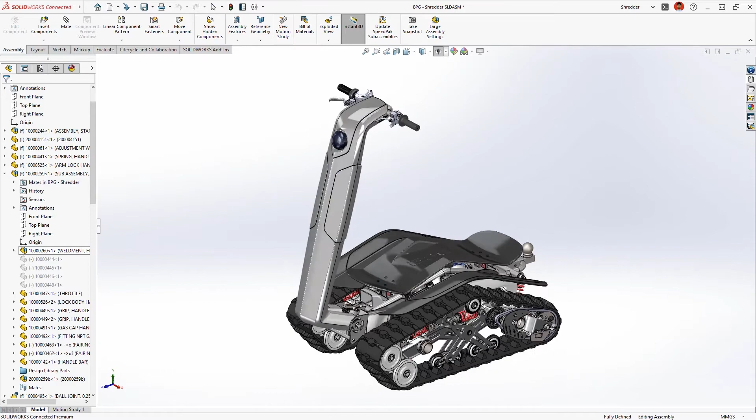SolidWorks is the most feature-rich CAD solution available, but that doesn't mean significant improvements can't be made. In SolidWorks 2023, we focused on expanding the capabilities of existing features to make you more productive.

Inscribing information such as serial number or model names into cylindrical surfaces is best done with single-line fonts. SolidWorks 2023 allows you to scribe these fonts using the wrap feature.

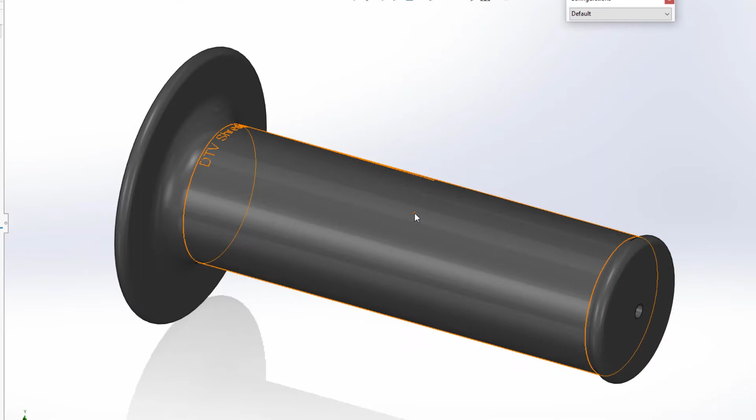Adding the DTV logo to the end of this handle is easy with library features, just drag and drop. However, in some situations, a reference may not be valid or otherwise broken. In 2023, you now have the option to keep the feature and solve the issue manually, rather than having to cancel the action, edit the library feature, and reapply.

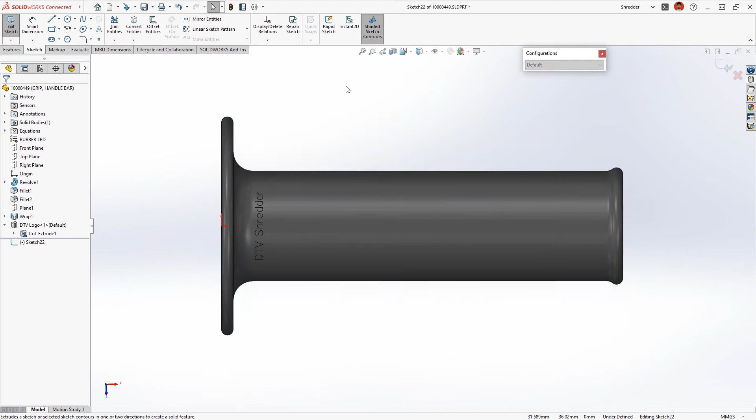This design is a good start, but the smooth surface may not provide enough grip for the rider. Let's create a pattern of ellipse-shaped bosses to give the rider confidence when traveling over even the most extreme terrain.

In SolidWorks 2023, you can now create ellipses with construction geometry, making orientation effortless by selecting a construction line, then choosing the appropriate relation. Fully defining the ellipse is now easier too, since you don't have to select multiple points to define the major and minor axes.

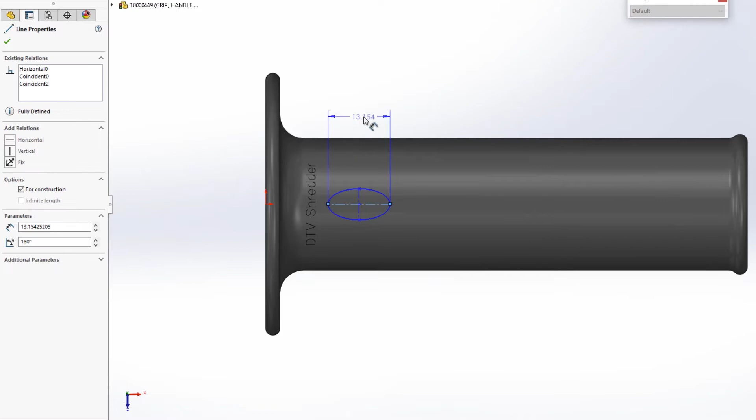Creating an offset body is easy in SolidWorks, but how far along the handle should we place it? Since we're creating a pattern of these bodies, it would be best to define the parameter based on a global variable that also defines the spacing of the instances.

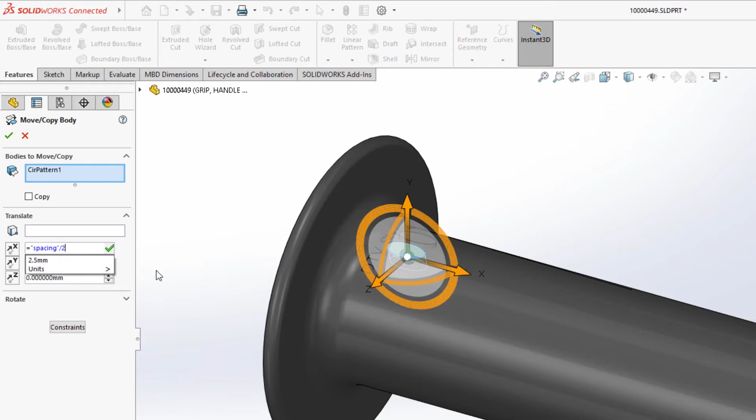In SolidWorks 2023, the Move Copy Bodies command can now define translation and rotation of bodies with equations, even on a per configuration basis. A design like this tends to be iterative, so having convenient access to these parameters will save time. Using these equations and variables in several features allows us to make broad changes without having to edit each individual feature.

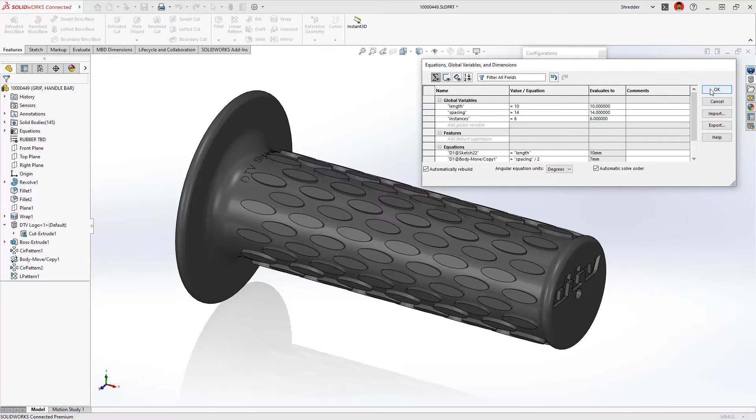Finally, reducing part complexity and protecting intellectual property are a great use of the defeature tool, but in some cases you may not want to create a whole new part that will need to be managed, stored, or otherwise lifecycle managed with a PDM system.

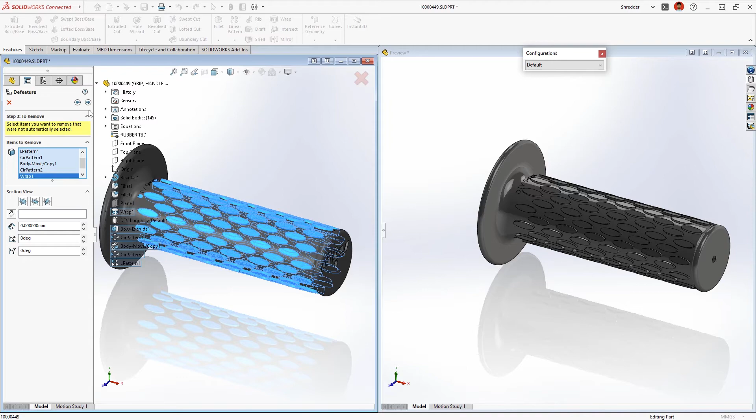SolidWorks 2023 SP1 will allow you to create a configuration of your defeatured parts, which can be useful for creating simplified versions. And since it's a derived configuration, it will adopt changes made to its parent configuration. Also, replacing the complex version of this component in the assembly no longer requires selecting a new part file and reattaching mates. Simply select the configuration from the drop-down menu.

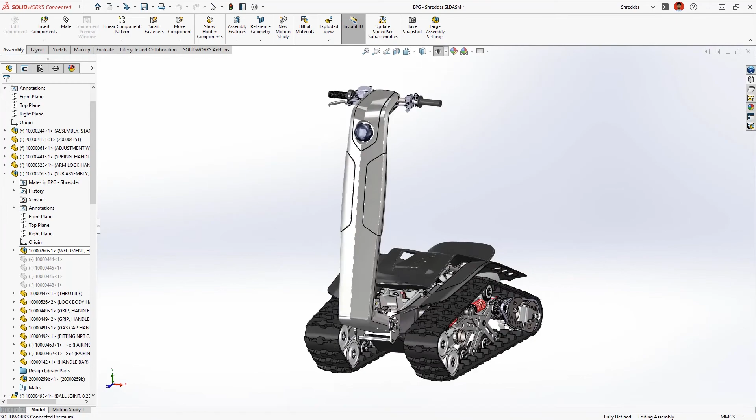SolidWorks is the most feature-rich CAD system, and now those features are even better with this latest release. Whether you're sketching, inscribing text, or working with bodies, these tools are even more flexible, giving you more ways to increase your productivity than ever.